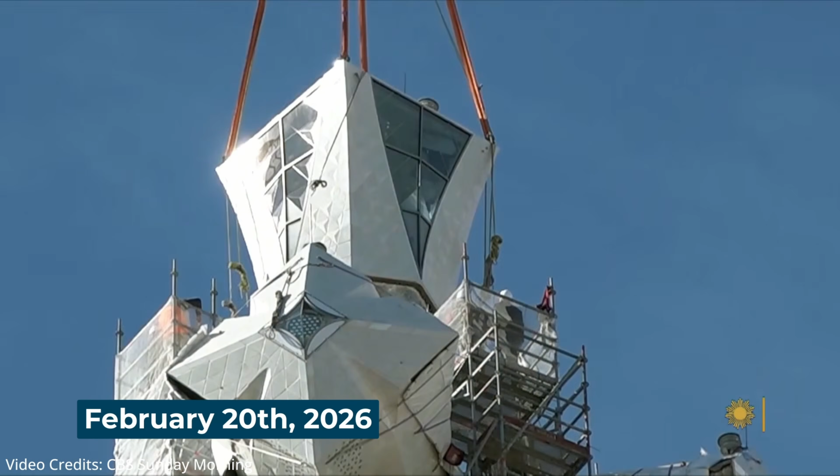On February 20th, 2026, workers installed the final arm of the cross on the Tower of Jesus Christ. The structure reached 172.5 meters, taller than St. Peter's Basilica in Rome, taller than any church ever built. The papal blessing came on June 10th, exactly 100 years after Gaudi died. That symmetry was not a coincidence. The Sagrada Familia Foundation planned for that moment for decades.

And it's real. The central tower, the one Gaudi always intended to be the highest point, the one representing Christ above all others, is structurally done. Some of the workers who completed it had grandparents who worked on the same building. That is what 144 years looks like in human terms. The world's tallest church is finished. That part is true. Now for the no.

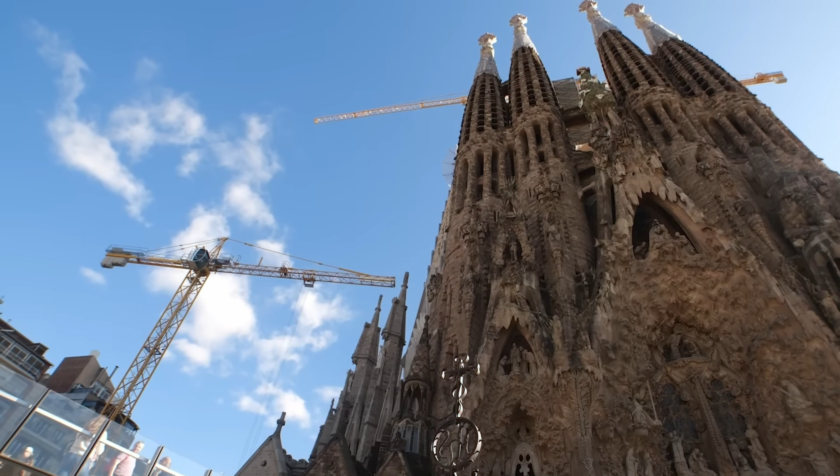The interior of that same tower is still under construction. Work continues through 2027 and 2028. And the Tower of Jesus Christ is just one piece. Gaudi designed 3 grand facades. The Nativity facade faces east, the Passion facade faces west, and the Glory facade facing south, the one Gaudi considered the main entrance, is the most important of the 3.

Construction on its vertical walls only began in June 2025. 3 artists have submitted proposals for its sculptural program, but the board has not made a final selection yet and has set no deadline to do so. Full completion is estimated around 2034. So the main entrance of the world's tallest church doesn't exist yet. Visitors entering this week are using a side entrance.

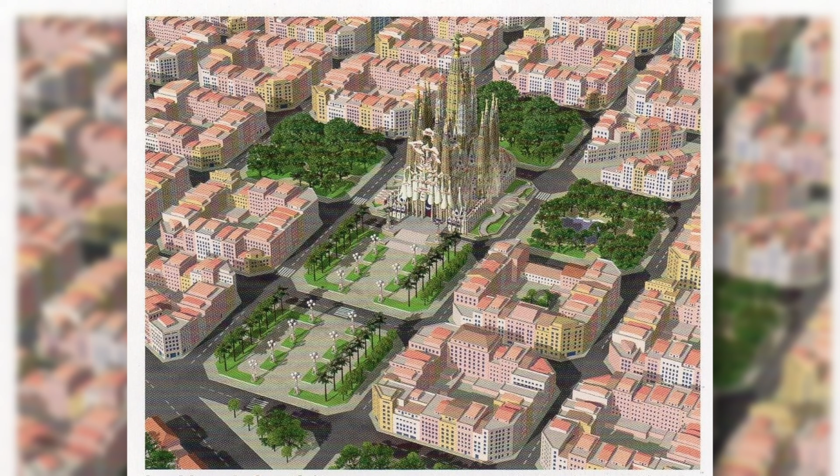The front door Gaudi designed, the one he considered the most important part of the building, is still years away, and finishing it will start a fight. To build the Glory facade as Gaudi designed it, a grand staircase needs to connect the entrance down to street level, 60 meters long. The problem? Residential buildings now occupy that space.

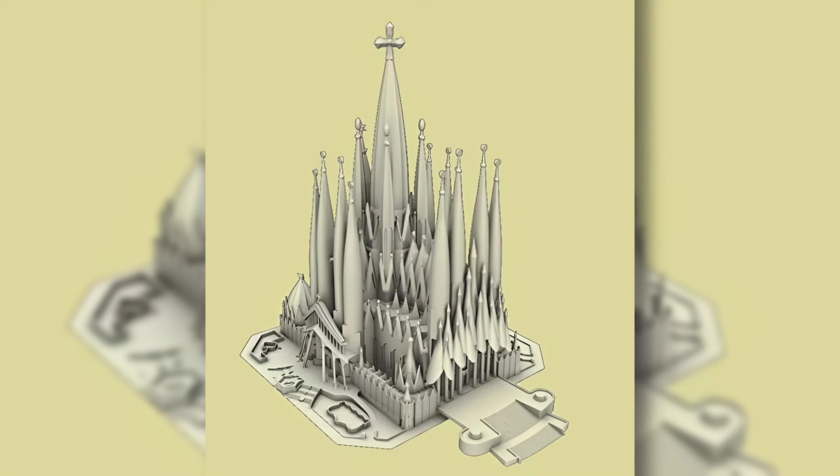Completing the staircase means demolishing those buildings and relocating approximately 3,000 residents and businesses. The estimated cost? Between 150 and 200 million euros. The Sagrada Familia Foundation says it will cover those costs. In 2019, the church quietly bought an empty plot of land a block away, widely seen as preparation for relocating displaced residents. But no legally binding agreement with Barcelona City Council has been signed.

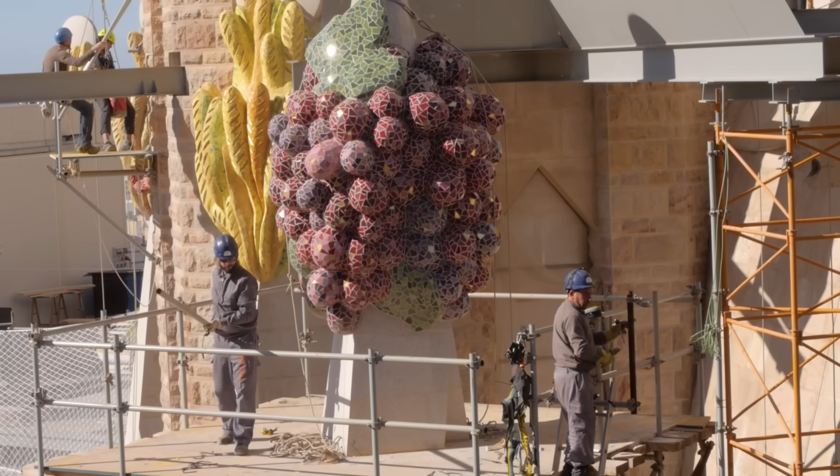Residents have filed lawsuits. Some argue the staircase was never part of Gaudi's original vision. The foundation says the surviving drawings show it clearly. Both sides are arguing about an interpretation of plans that were burned in 1936. The dispute is unresolved. It will likely end up in court. Full completion is now estimated between 2034 and 2035.

And here's one more layer. Even the parts that are already done are contested. In 2021, a 12-pointed crystal star was installed on top of the Virgin Mary Tower. It was immediately criticized, not just for how it looked, but for what it represented. Gaudi's original plans were burned by anarchists in 1936. What survived were fragments, photographs, and memory.

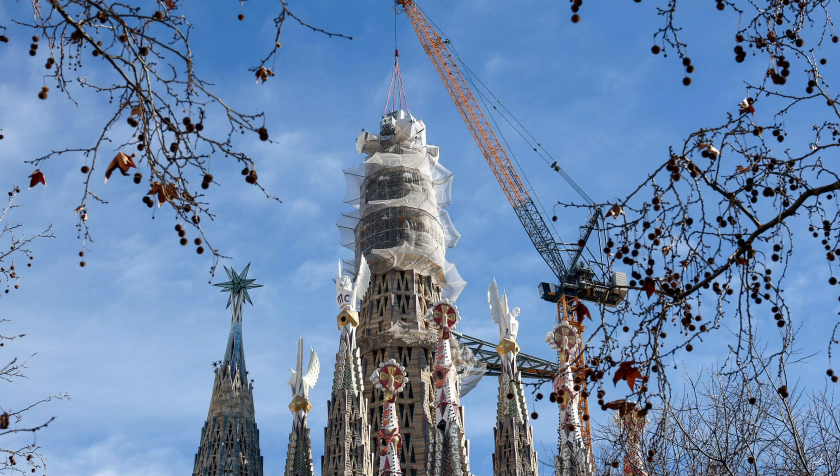Every decision made since then is someone's interpretation of what Gaudi intended. The crystal star is just the most visible recent example of that problem. It's not an aesthetic argument. It's a deeper decision, whether what's been built is actually his building. That question doesn't go away when the cranes come down.

So, is the Sagrada Familia finally complete? One tower is done. The world's tallest church is real. The Pope blessed it this week on the 100th anniversary of Gaudi's death. That milestone is historic, and it deserves to be.

But the building Gaudi actually designed, all 3 facades, the staircase, the full sculptural program, is still about a decade away. And some of what gets built in that decade will still be debated. Gaudi said his client wasn't in a hurry.

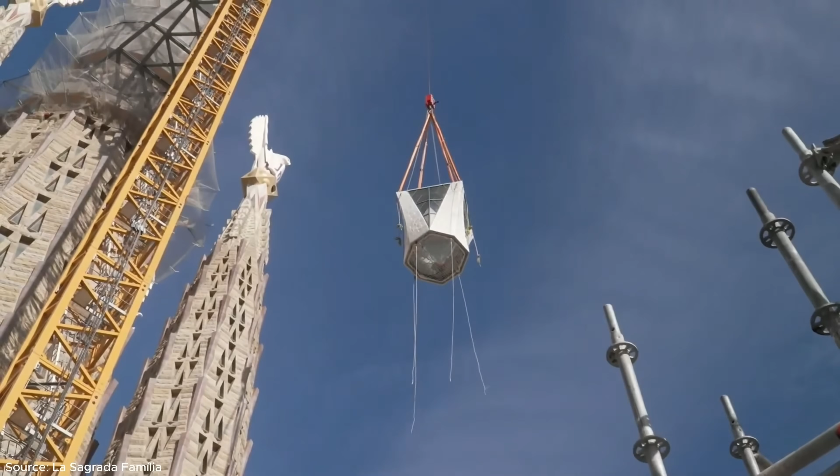On February the 20th, 2026, workers lifted the final arm of a 17-meter cross into the Barcelona sky. When it locked into place, the Sagrada Familia became the world's tallest church, 144 years after construction began.

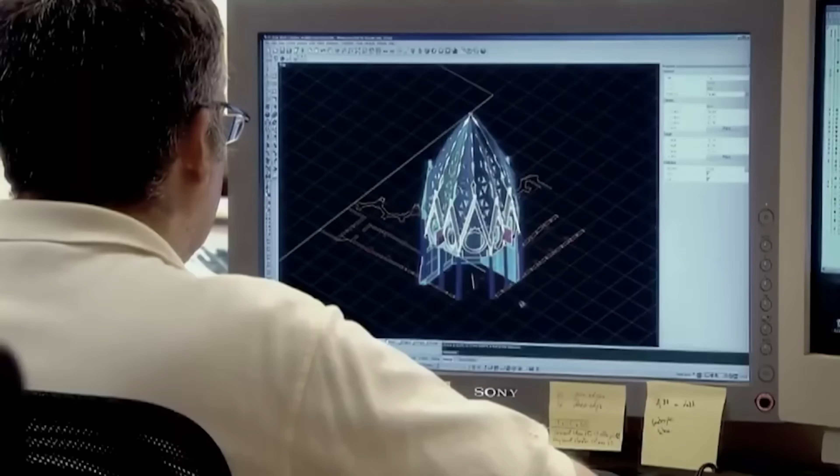144 years. That's how long this building has been under construction. Workers laid the foundation stone in 1882, before the Eiffel Tower existed, before the first skyscraper, before anyone had poured reinforced concrete. The building has survived 2 world wars, a civil war that destroyed the construction plans, a pandemic that halted work entirely, and technological revolutions that changed how humans build. So what does it take to finish a construction project that's outlasted empires?

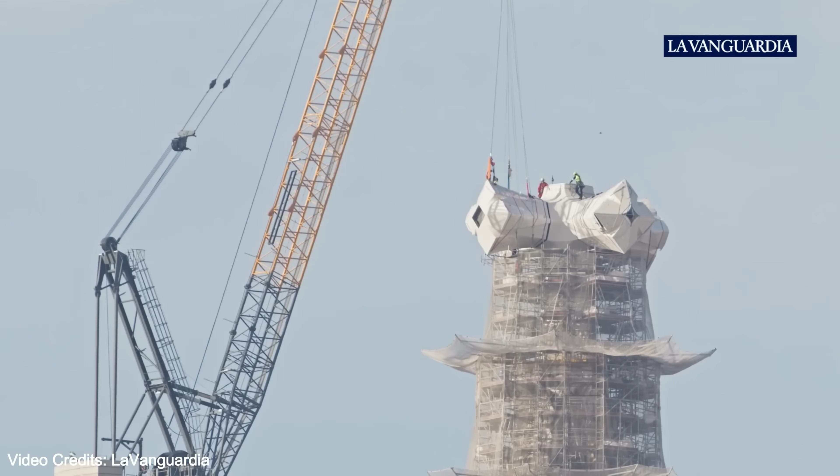By mid-January 2026, workers had installed all 4 horizontal arms of the cross. On February 20th, they installed the upper arm, bringing the tower to its highest point. The structure is complete. The entire structure reaches 172.5 meters, taller than St. Peter's Basilica in Rome and nearly twice the height of Big Ben in London.

That final height isn't arbitrary. Gaudi believed human creation shouldn't exceed God's work, so he deliberately designed the tower to stand 1 meter shorter than Montjuic Hill, Barcelona's highest natural point.

The timing carries enormous significance. 2026 marks the centenary of Gaudi's death. The Sagrada Familia Foundation has planned a year of commemorative events, starting with a solemn mass on June 10th and culminating in the lighting of the Nativity facade in December. Pope Leo XIV is expected to visit during 2026. If confirmed, it would be the first papal visit since Pope Benedict XVI consecrated the basilica in November 2010.

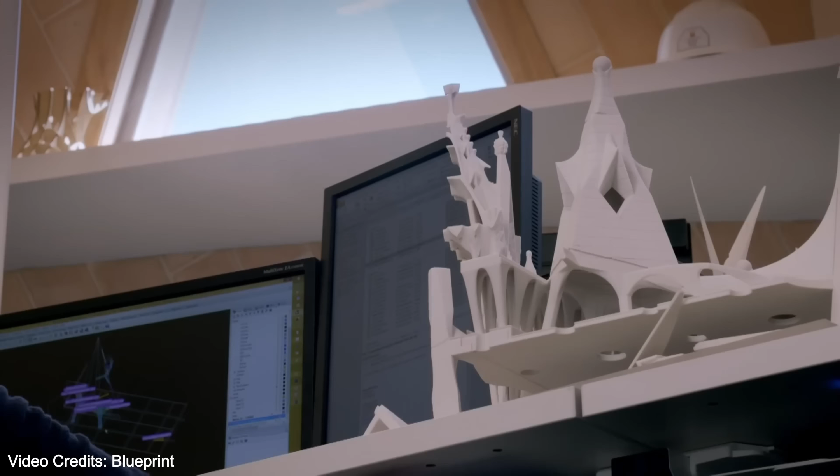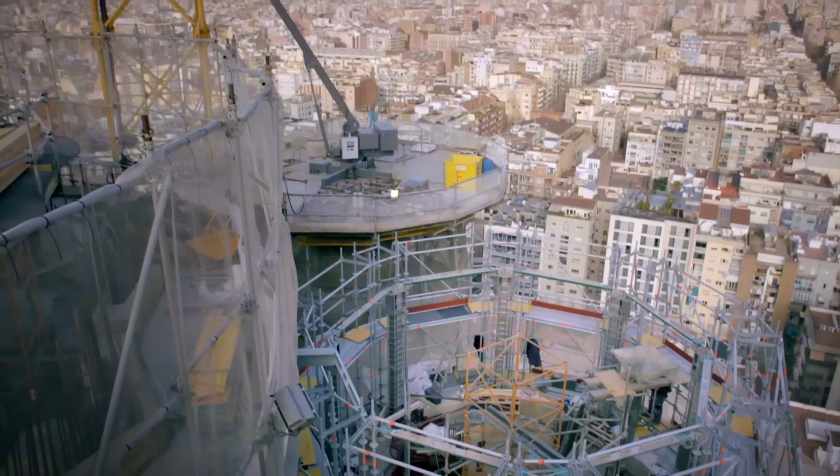Construction began on the Glory facade's vertical walls in June 2025. Meanwhile, 3 artists are creating sculptures for the Chapel of the Assumption. Tourism funds everything. In 2024, 4.9 million visitors paid to tour the basilica, more than visited the Statue of Liberty or the Colosseum in Rome, generating 44.7 million euros for construction. About 15% of those visitors came from the United States.

The story begins not with Gaudi, but with a bookseller. Josep Maria Bocabella founded the Spiritual Association of Devotees of St. Joseph in 1866. After visiting the Vatican in 1872, he returned to Barcelona determined to build a church inspired by the Basilica at Loreto. On March 19, 1882, workers laid the foundation stone in Barcelona's Eixample district.

The first architect, Francisco de Paula del Villar, designed a standard neo-Gothic church. But del Villar resigned on March 18, 1883, after disagreements with the project advisors. The commission passed to a relatively unknown 31-year-old architect named Antoni Gaudi. Gaudi threw out del Villar's conventional plans entirely. He envisioned something Barcelona had never seen: a massive basilica with 18 towers representing the 12 apostles, the 4 evangelists, the Virgin Mary, and Jesus Christ at the center.

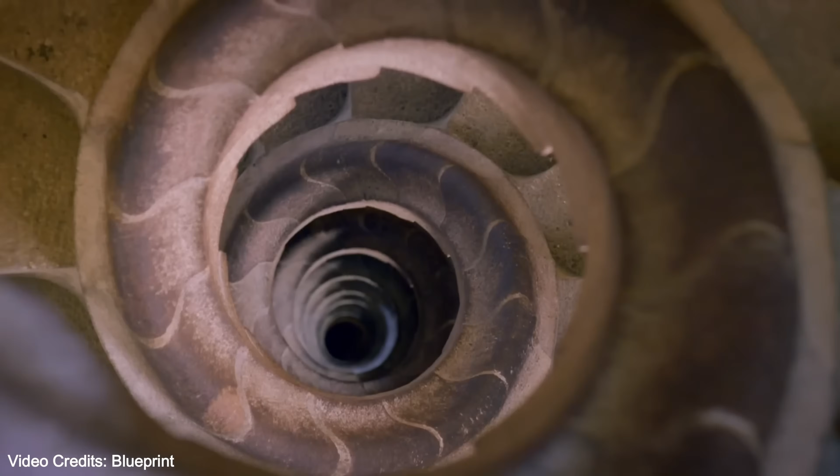His inspiration came from nature. He studied trees, bones, mountains, and shells, translating their organic forms into architecture. Columns branched like trees. Towers spiraled upward like seashells. The basilica would tell the story of Christ through 3 grand facades. The Nativity facade would celebrate birth and life. The Passion facade would depict suffering and death. The Glory facade would represent resurrection and eternal life.

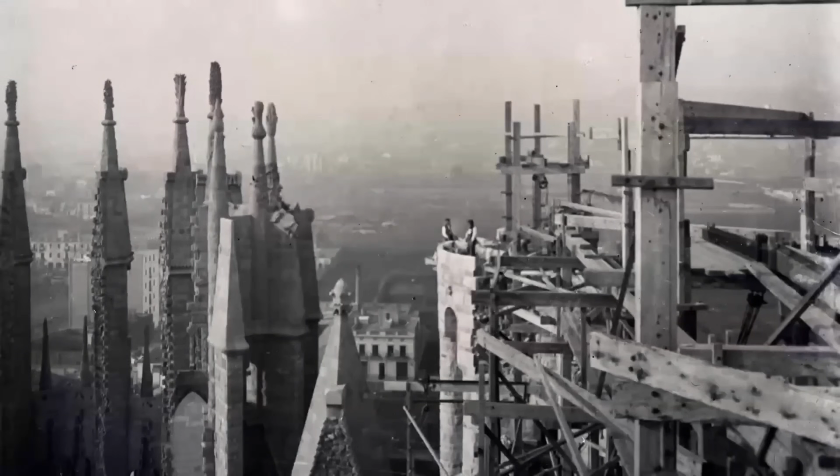Gaudi knew he wouldn't live to see it finished. He often said his client wasn't in a hurry. From 1883 until 1914, Gaudi worked on multiple projects across Barcelona. But after 1914, he devoted himself exclusively to Sagrada Familia. He moved into a workshop on site, spending 16-hour days refining models and calculations.

On November 30th, 1925, Gaudi witnessed the completion of the Tower of Barnabas. It was the only tower he ever saw finished. By the time of his death, less than 1/4 of the basilica was complete, but he had created detailed plaster models and calculations that would guide future architects.

Gaudi's final day was June 7, 1926. While crossing Gran Via de les Corts Catalanes at Bailén Street, Gaudi stepped back to avoid an approaching tram. He didn't hear or see a second tram coming from the opposite direction. It struck him at 6:05 in the evening. The 73-year-old architect fell, hitting his head on the pavement.

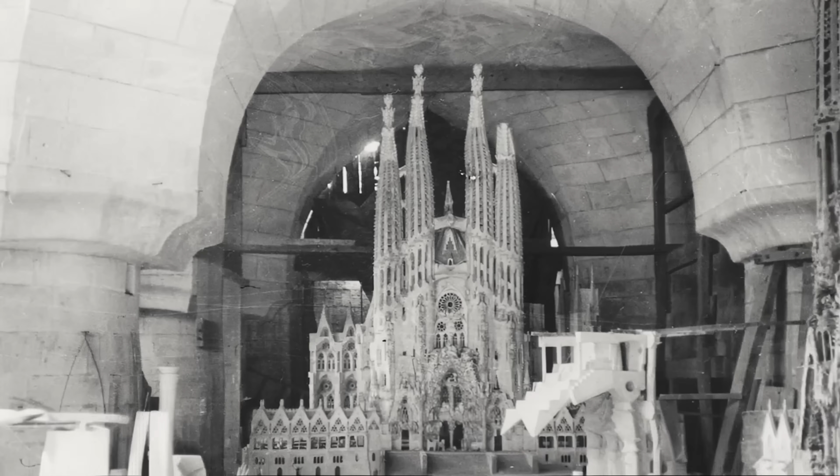In his final years, Gaudi had lived austerely, wearing shabby clothes and focusing entirely on his work. Passers-by mistook him for a beggar. Taxi drivers refused to transport him. A police officer eventually took him to Hospital de la Santa Cruz. The chaplain from Sagrada Familia didn't recognize him until the next day. It was too late. Gaudi died on June 10, 1926, 15 days before his 74th birthday.

Thousands of Barcelona residents lined the streets for his funeral procession. He was buried in the Chapel of Our Lady of Mount Carmel in the crypt where his remains rest today. Construction continued under Dominic Sugranes until July 20, 1936.

2 days after the Spanish Civil War began, members of the Federación Anarquista Ibérica stormed the construction site. They torched the workshop, destroyed Gaudi's models, burned drawings and photographs, and set fire to the crypt. They even smashed the lid of Gaudi's tomb.

The anarchists returned with dynamite, intending to destroy the Nativity facade completely. A government representative intervened at the last moment, saving the basilica from total destruction. The loss was catastrophic. Most of Gaudi's detailed plans, models, and notes were gone.

12 people connected to the construction project were killed during the Civil War. Sugranes died in 1938 at age 59. After the war ended in 1939, architect Francesc de Paula Quintana took over. He spent a decade reconstructing what he could from surviving fragments, published photographs, and memory. Workers gathered thousands of pieces of smashed plaster models, trying to reassemble them like puzzles.

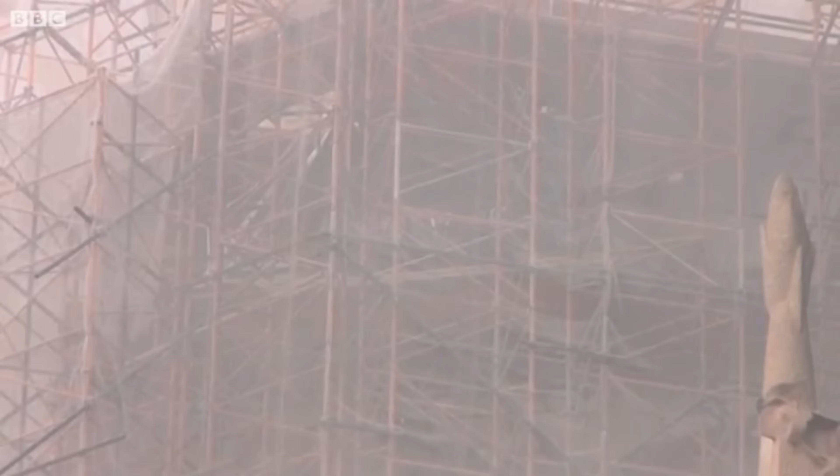Then came another setback. On April 19, 2011, an arsonist set fire to the sacristy, forcing the evacuation of 1,500 tourists. The fire burned for 45 minutes. A 65-year-old man with mental health issues was arrested at the scene.

COVID-19 brought construction to a halt on March 11, 2020. For nearly 4 months, work stopped completely. The basilica reopened on July 4, 2020, but the pandemic's economic impact had severely reduced visitor numbers and funding.

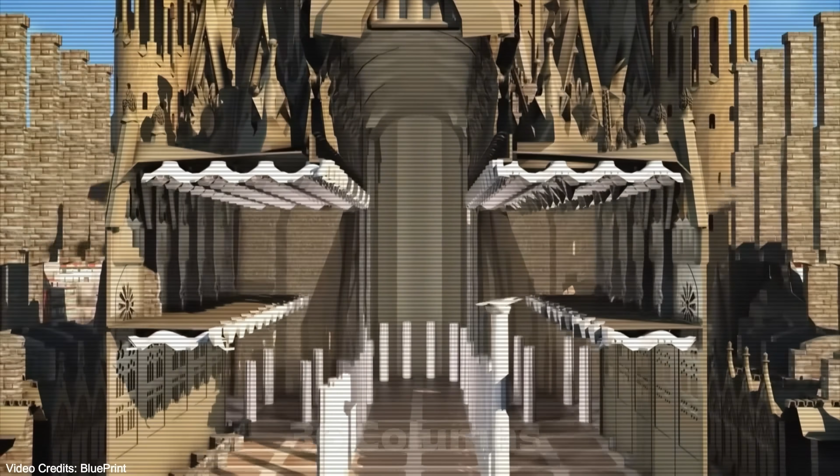Here's the core problem. Sagrada Familia has 36 interior columns supporting the roof, each one unique, none straight. For comparison, Notre Dame Cathedral in Paris has just 10 primary columns. Each column starts as a geometric shape at the base, hexagon, octagon, or 12-sided.

As it rises, it twists and transforms. A hexagonal column at the ground level becomes an octagon at mid-height and splits into branches near the ceiling. The twist rate varies. Some columns rotate 15 degrees over their height, some 30. These aren't decorative choices. Gaudi calculated load distribution through branching.

One column at the crossing supports the tower weight above, approximately 6,000 tons. Instead of channeling that force straight down through a single massive pillar, the column branches into 4 smaller supports. Each branch carries a fraction of the load, spreading stress across the foundation.

The geometry is hyperbolic paraboloid, the same shape you'd get if you twisted a square piece of paper while pulling opposite corners. The stone surface curves in 2 directions simultaneously. There are no flat faces to measure from, no right angles to reference.

When the Civil War destroyed Gaudi's models in 1936, architects lost the exact specifications for how each column should transform as it rises. Photographs showed the overall shapes. Surviving plaster fragments gave clues, but the precise twist rates, branch angles and connection points were gone.

Francesc de Paula Quintana spent 10 years after the war reconstructing what he could. Workers gathered thousands of pieces of smashed models, matching edges like jigsaw puzzles. But gaps remained, entire columns with only partial data.

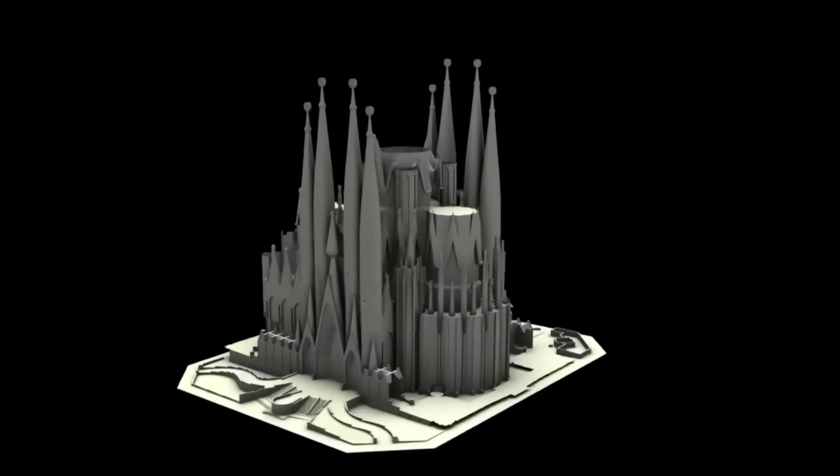The breakthrough came in the 1980s when Mark Burry introduced software designed for airplane wing analysis. The software could input the incomplete data from Gaudi's fragments, calculate the missing geometries, and verify whether the reconstructed shapes would actually hold the basilica's weight. But verifying the math didn't solve the construction problem.

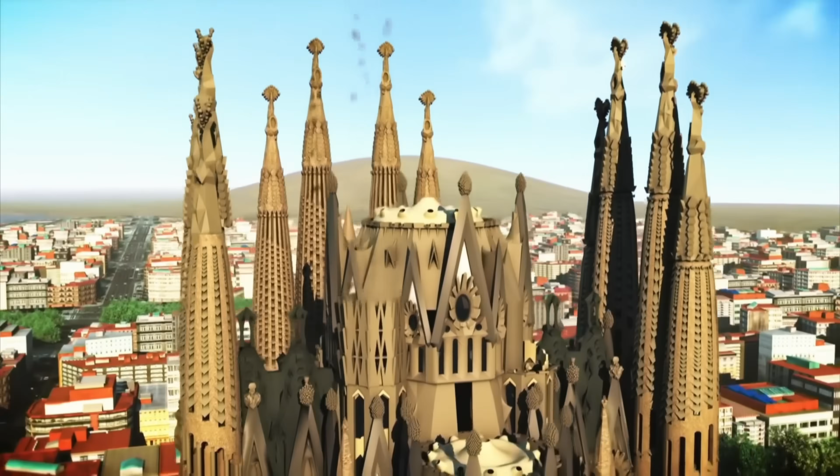Each column requires between 800 and 1200 individual stone blocks, more pieces than a typical family home has bricks, carved to fit together with millimeter precision. The blocks must account for the column's twist, the surface curvature in two directions, and the exact angle where branches split. Human stone carvers working with traditional tools would need months per column, and even then, errors accumulate.

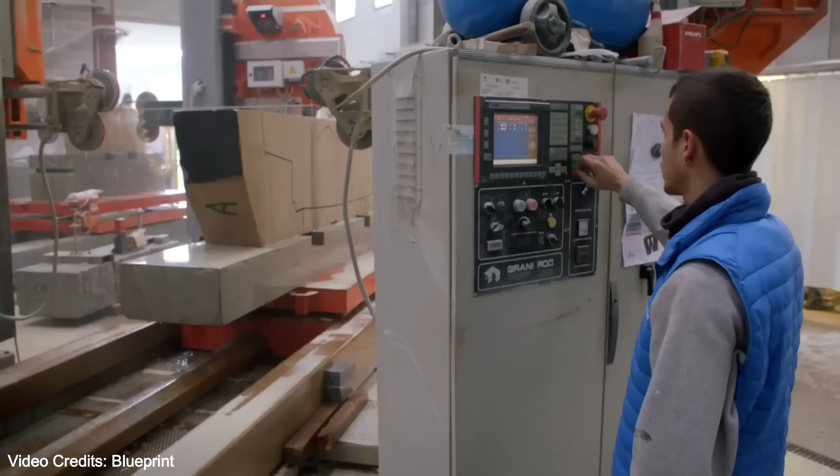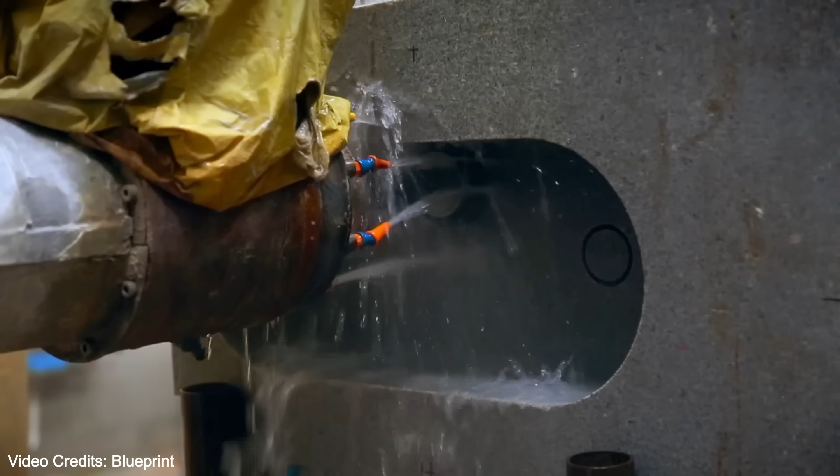That's why Dutch engineers built a CNC milling machine specifically for this project. The machine receives the digital column geometry from Burry's calculations. Then it cuts stone initially using a 4-axis, now 7-axis robotic arm, meaning it can rotate and tilt the cutting bit in multiple directions simultaneously while moving across the stone surface. The cutting precision is 0.1 millimeters.

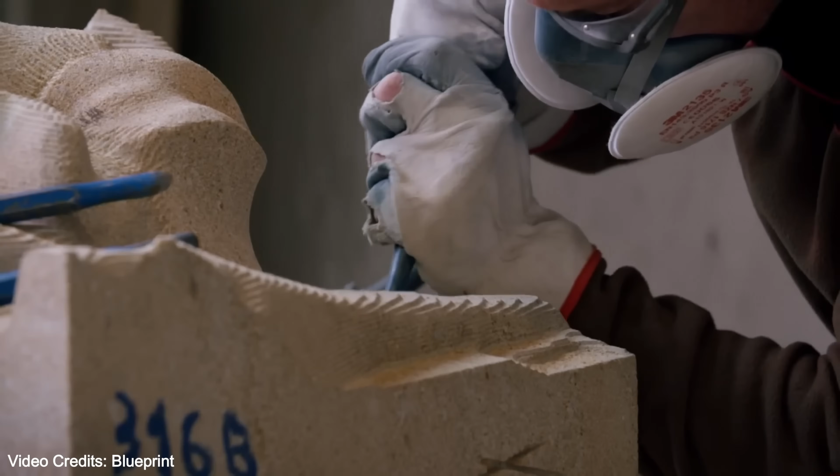For comparison, human error with hand tools typically falls within 2 to 3 millimeters. When you're stacking 1,200 blocks over a 20-meter column, those errors compound. A column off by 3 millimeters at the base will be off by half a meter at the ceiling. The branches won't align, the vault won't connect. The machine eliminates that error.

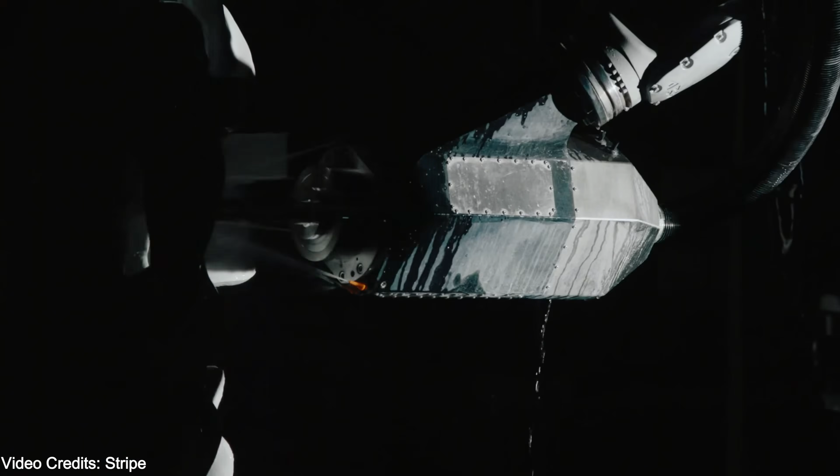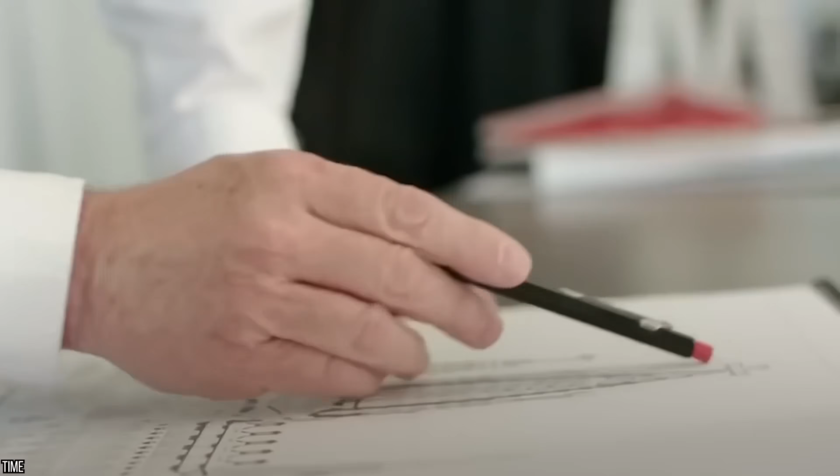It can cut a stone block's complex curved surface in 6 hours, work that would take a master carver 3 weeks. More importantly, the 1,200th block fits exactly as precisely as the first. This is why completion is possible now when it wasn't before. The combination of aeronautical stress analysis software and 5-axis CNC stone cutting solved both the design verification problem and the construction precision problem. Gaudi's vision required 21st century technology to execute.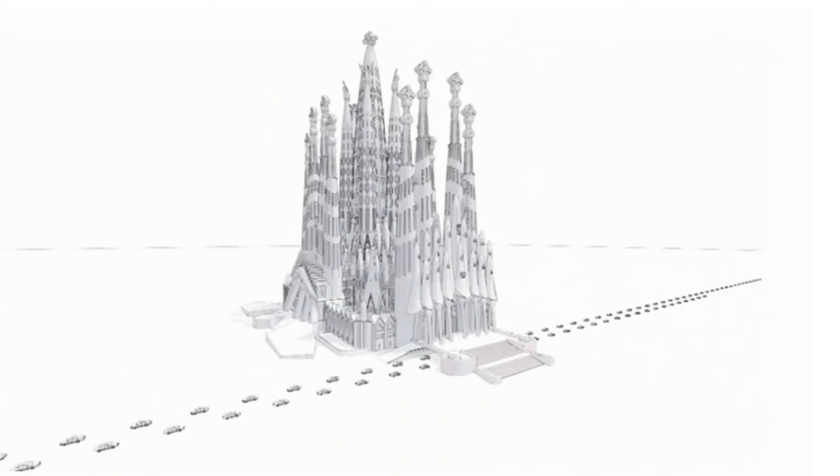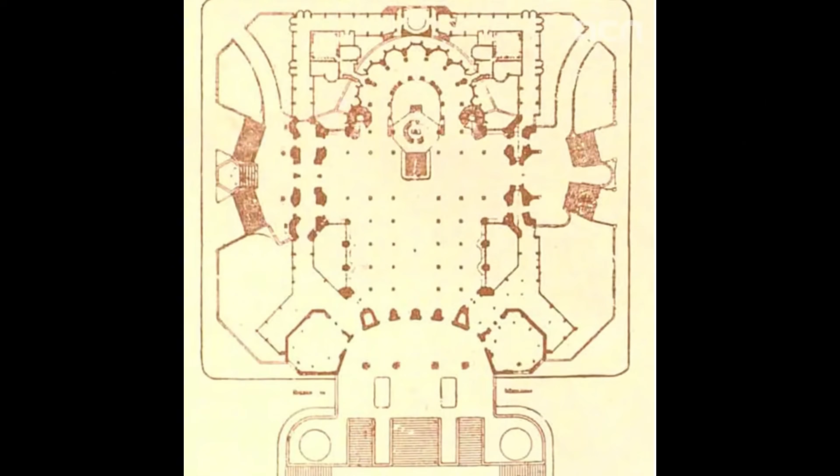Residents filed lawsuits claiming the staircase wasn't in Gaudi's original plans. They argue the construction board is inventing justifications to expand the basilica's footprint. The Sagrada Familia Foundation insists the staircase is essential. Gaudi's surviving drawings show it clearly. The foundation argues that completing his vision requires temporary displacement, with affected families receiving compensation and relocation assistance. In February 2025, Chief Architect Jordi Faulí announced they would proceed despite protests.

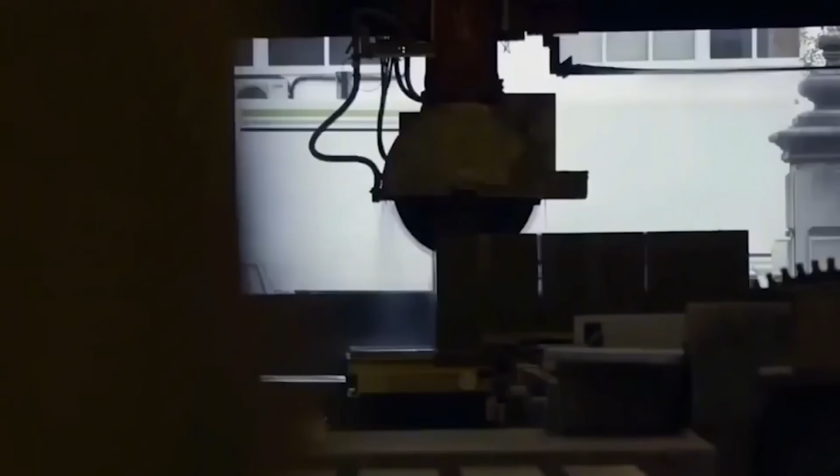Some architecture critics argue that continuing construction betrays Gaudi's memory. They claim modern architects can't truly interpret his fragmentary plans. Others counter that leaving it unfinished would betray Gaudi's vision. The architect left detailed geometries and structural principles, enough for successors to work from. Leaving it unfinished would be the real betrayal. The basilica operates as an expiatory temple, meaning it can't accept government money or bank loans. It relies entirely on private donations and ticket sales.

The neighborhood around Sagrada Familia struggles with over-tourism. Local shops have been replaced by souvenir stores. Residents complain about noise, crowds, and rising housing costs driven by short-term vacation rentals.

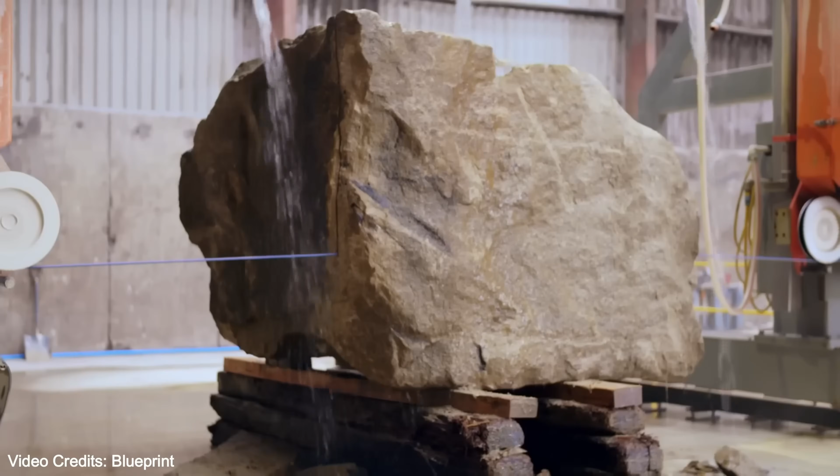After 144 years of construction, the question isn't just when it will finish, it's why now. For decades, completion seemed impossible, but modern technology solved what human hands couldn't. CNC machines cutting complex stone, software verifying destroyed plans, and tourism funding generating millions annually. These 3 breakthroughs made completion finally achievable. Here's what completion actually means. There are 3 finish lines.

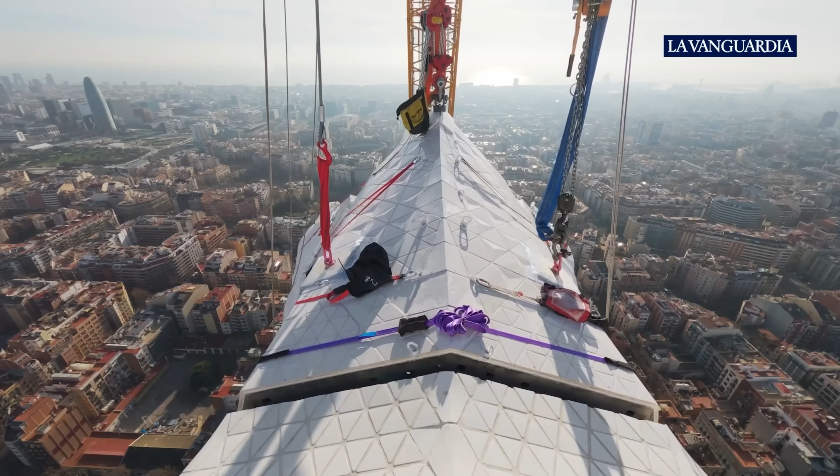2026 marks the symbolic completion. The Tower of Jesus Christ, the central spire that represents Gaudi's entire vision, will be blessed and finished. This is the tower that makes Sagrada Familia the world's tallest church. It's the element Gaudi himself designed to stand at the peak, representing Christ ascending to heaven. When this tower is complete, Gaudi's spiritual and architectural vision is realized.

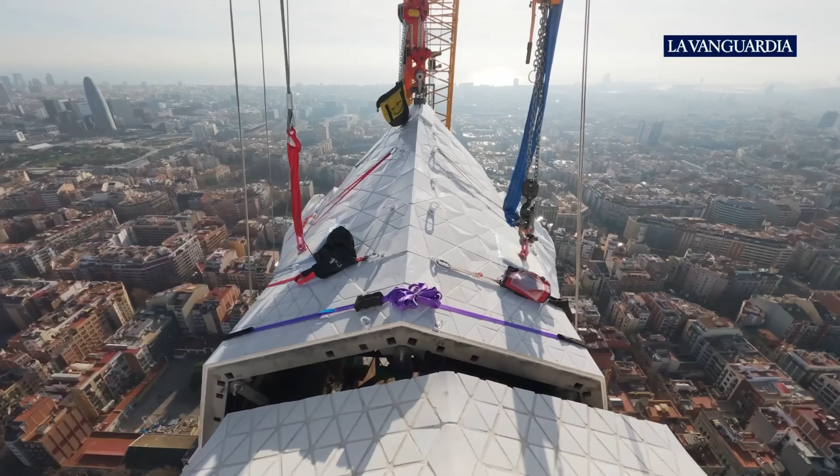2033 marks the structural completion. All 18 towers will be built. The Glory facade walls will stand. The main vaults and roofs will be in place. This is when the last major stone is laid, 151 years after construction began. The building's skeleton will be finished. And 2035 marks the decorative completion. The Glory facade sculptures, interior details, and final ornamental work will be carved. This is when craftspeople set down their tools for the last time.

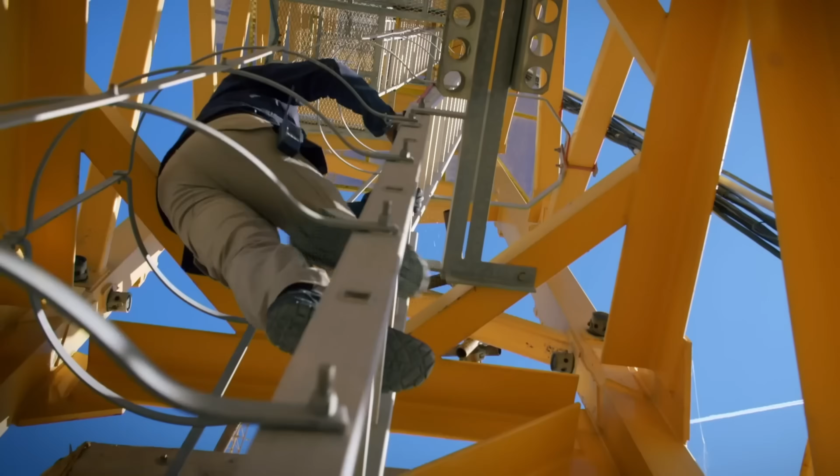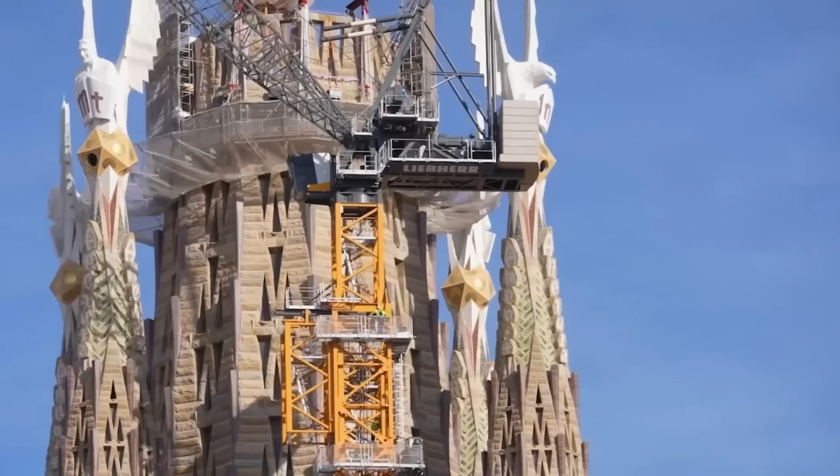After the tower opens in 2026, the viewing platform inside the cross will become accessible to visitors, probably in 2027. Visitors will climb to 172 meters and look across Barcelona from the world's tallest church. Architects, sculptors, and craftspeople have dedicated entire careers to this building. Some will retire having worked their whole lives on a structure their great-grandparents also helped build.

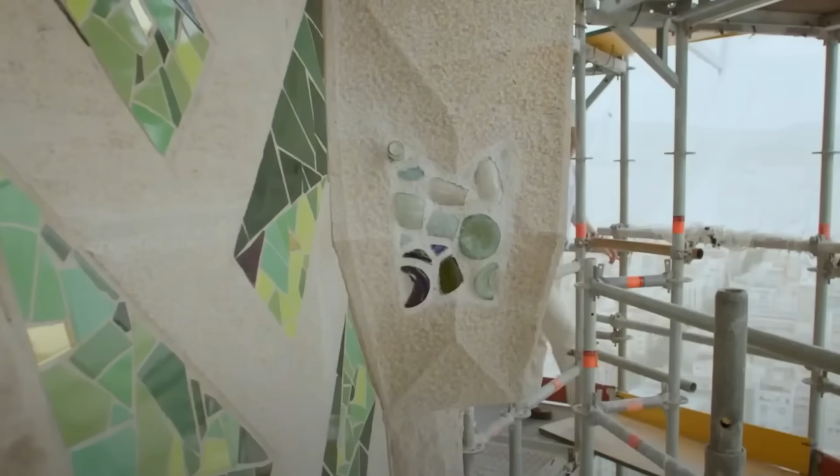When the last stone is placed, Sagrada Familia will transform from a construction site into a completed monument. The cranes will come down, the scaffolding will disappear. That moment will reveal whether modern architects truly captured Gaudi's vision. It will show whether a century of different hands could create something unified, and it will demonstrate whether a 19th century architect's dream can still inspire the 21st century.

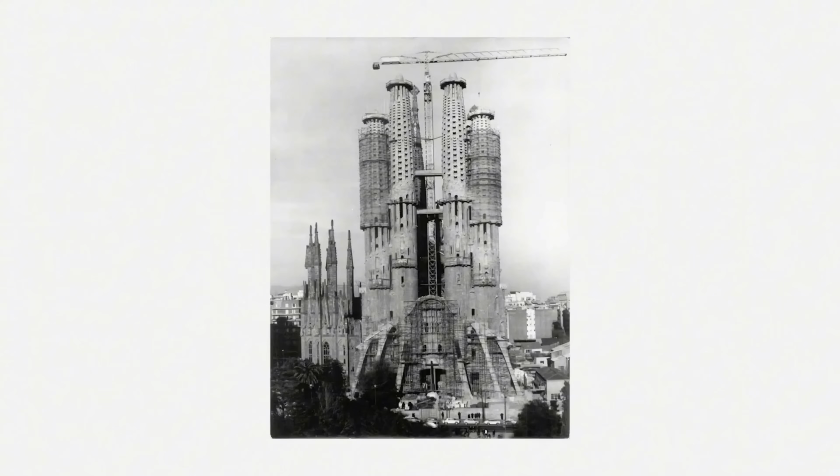Here's something to think about. In 2033, 151 years after Gaudi handed his first sketches to stone carvers, the last piece will be placed. Not by him, not by anyone who knew him. Now, those future generations are nearly done. Was Gaudi's vision worth the century-and-a-half wait? When you look at those towers reaching toward the sky, covered in light-catching glass and ceramic, do you think he'd be satisfied with what we've built in his name?